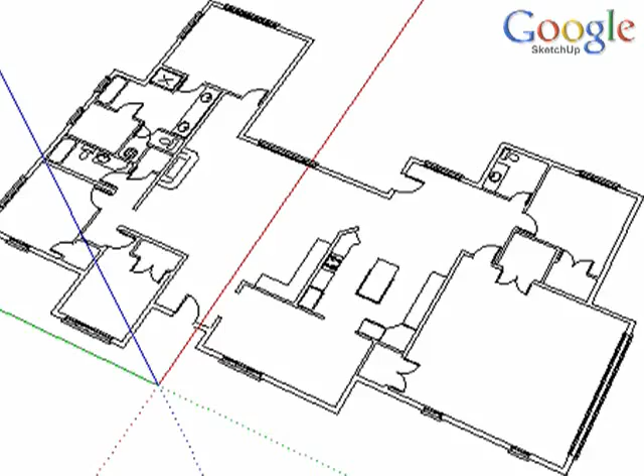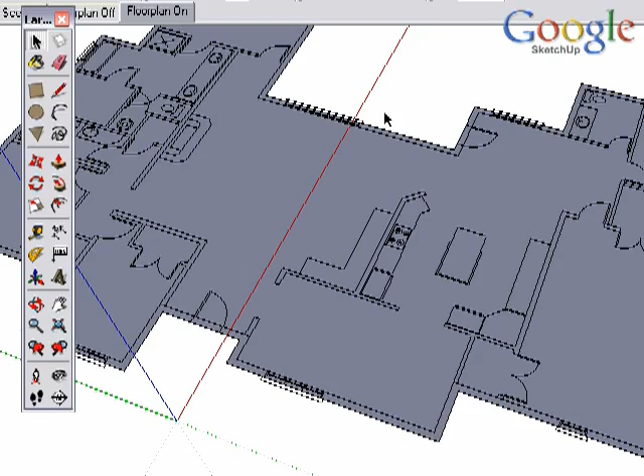There are many strategies to working with CAD files in SketchUp. This video introduces our recommended method, though we encourage you to tailor these techniques to best fit your workflow. Keep in mind that although this information should be useful to any SketchUp user, we will progress through the steps assuming you have a basic knowledge of SketchUp tools.

Start by going to the File menu and choose Import. Find the CAD file on your computer and open up the options. Check both of these boxes and leave those on by default. Set your units to match the units you had in your CAD software. Preserve drawing origin is important if you're going to bring in multiple CAD files.

Make sure under Files of Type that you've chosen AutoCAD Files so that you can see the CAD file to bring in. SketchUp will share some import information with you. Close that dialog box. Now let's examine the model.

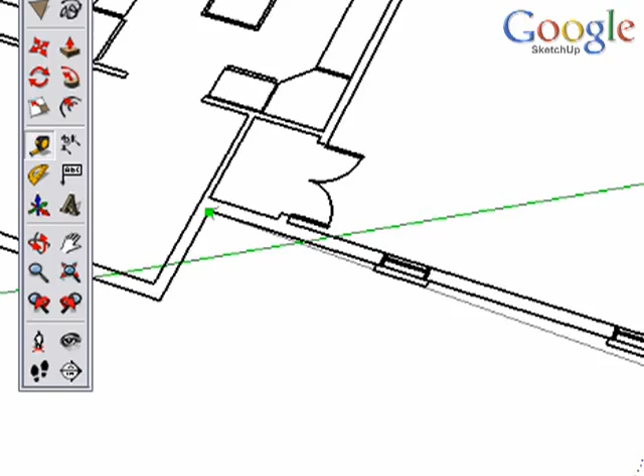The first thing you should consider and get in the habit of doing each time you import a CAD file is to check the physical size of the imported CAD file. Use the tape measure tool and measure something you know. I know this wall would measure at 5 feet, and so it's at the correct size.

However, often your CAD file will come in and it will not be at the correct size. If I measure this wall, it measures at 27 feet 6 inches. You can actually resize models in SketchUp by typing in a new dimension and pressing the Enter key. I made that wall 5 feet. I'm going to measure this wall again, type 5 feet, and now I know that it's at the correct size. So you can use the tape measure tool to resize the model if it's incorrect.

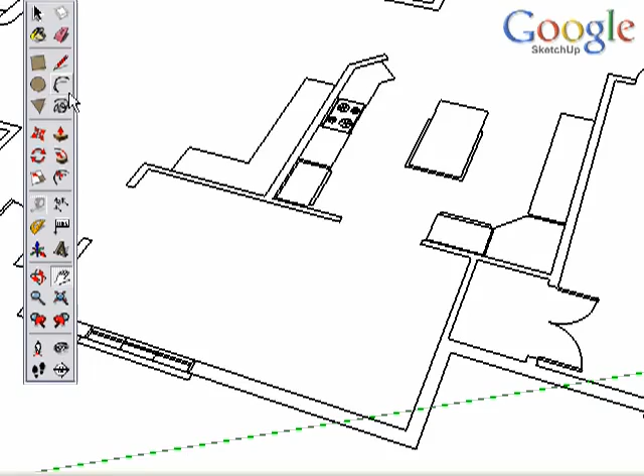This is a previous method for using CAD files. You trace over an edge, creating a surface, and then are able to pull that up. Now this creates some unnecessary lines that you need to clean up. Usually that's not too big a problem.

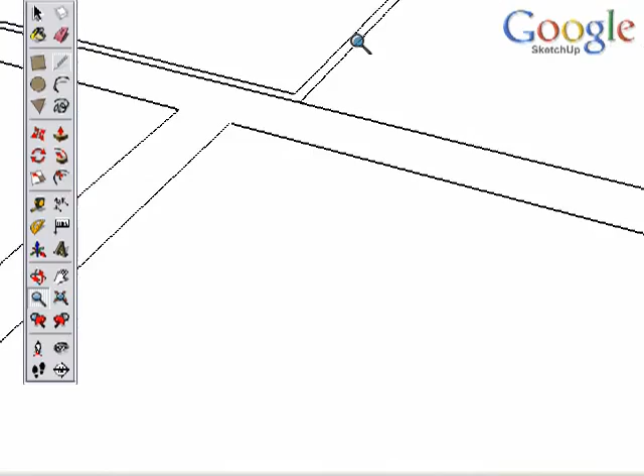The problem comes here. As you're working around your model and trying to create surfaces to pull up, sometimes it doesn't work. As we trace over these edges, nothing happens. And here's why: zooming in reveals that in fact these two edges don't meet. There's a little gap there, and SketchUp requires that we have a full closed loop of edges to form a surface, and that's why a surface couldn't be created.

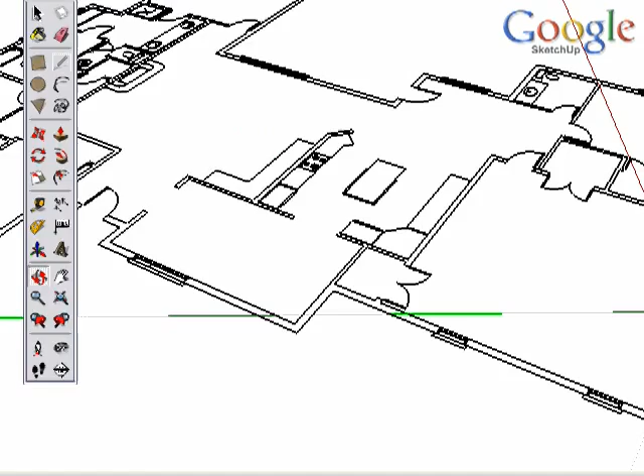Those little gaps tend to pop up all over in CAD files, and they're very difficult to find and just cause general problems. For that reason, we recommend the method where we create this CAD file as a group and use it as a reference only. We're not going to use it to create the geometry, we're only going to reference it and create a model on top of it. I'm going to import this CAD file again.

You'll notice that there was nothing existing in the space before, and as you see, it brings it in as lines and edges, and components out of things that were blocks in CAD. So I'm going to select it all and create a group.

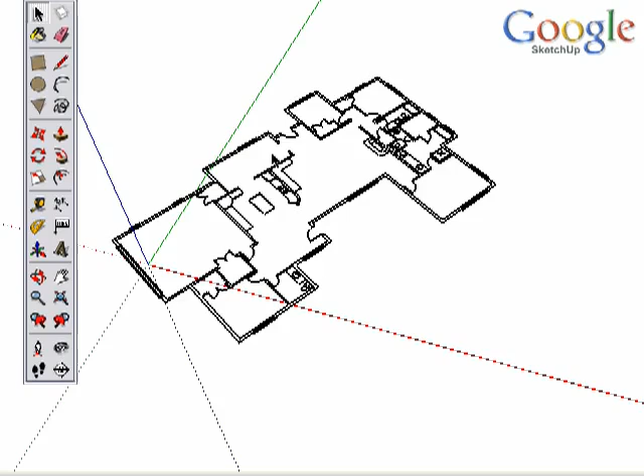We'll start a new file and show you what happens if you import a file and you have existing geometry. Let me draw a line. So now we have something existing in the model, and we import the CAD file. What you'll see is it's grouped automatically. Before it was not grouped, and we had to make it a group, and in this case it is grouped. That's just so you understand when things are grouped or not when you bring a CAD file in. If you have anything existing, your CAD file will be grouped automatically. Otherwise it won't, and you'll need to group it yourself.

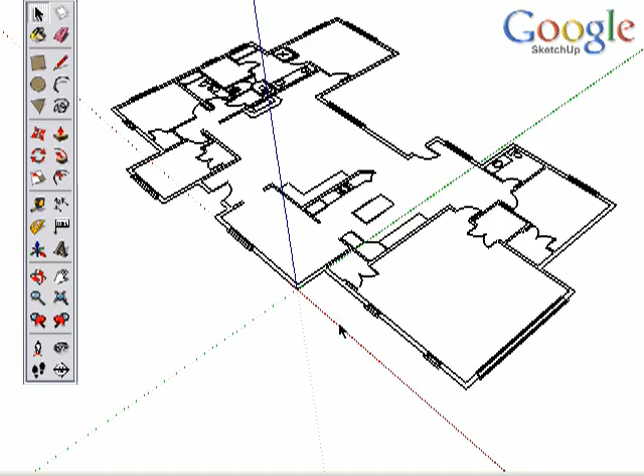The next thing we should do is line the axis up with the CAD file. We can do this with the axis tool very quickly and easily. Or as an alternative, if we left the axis in its default position, we could rotate the model and line it up with the axis.

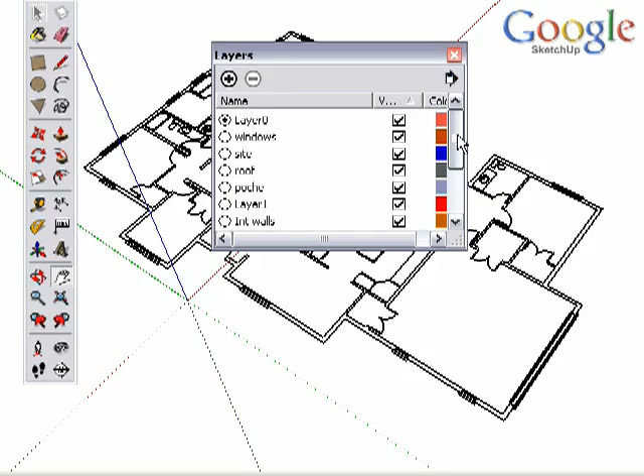Now let's look at the layers. When you bring in a CAD file, it brings in the many layers that you've created in your CAD program. These layers can cause a problem if we leave the geometry on all these different layers. So what we recommend is that you select all the layers that came in. You can see Layer 0 at the top. Select all the layers that were brought in with the CAD file, everything except Layer 0, and delete them.

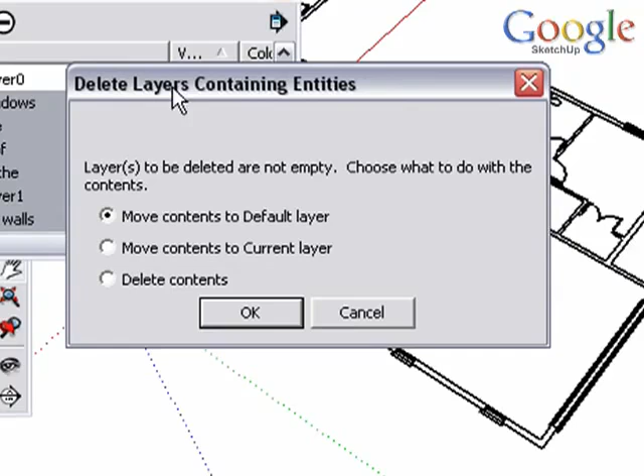And choose Move Contents to Default Layer. In this way, we won't delete anything that we've imported, but we move all the geometry to one layer, the default Layer 0.

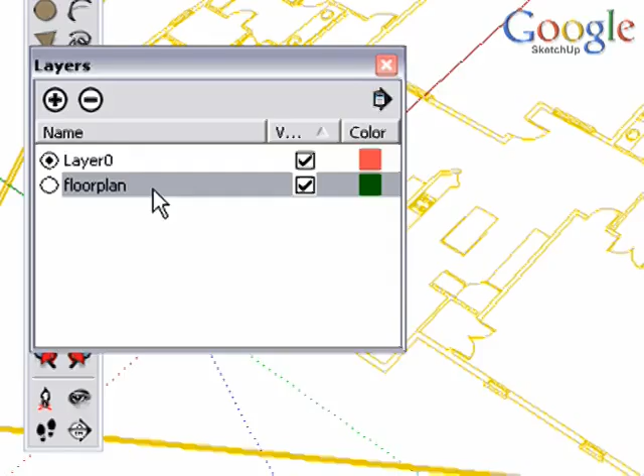Now let's create a new layer. We can name it Floor Plan, and we'll move this group to that layer. Bring up the entity info for the group, which you can do through a right or context click menu, and under Layer, choose Floor Plan to move it to that layer.

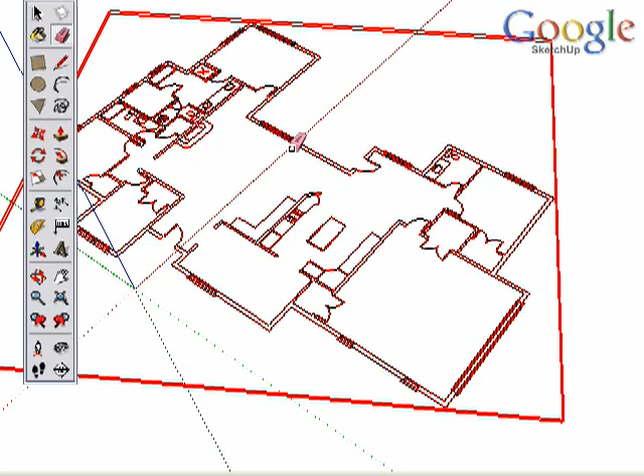Now in the Layer dialog box, we can turn the visibility of the layer on and off. This will become very useful, especially as it's a reference only, and we can turn that reference on and off. Right or context click on your group and choose Lock. Now we can't erase or otherwise manipulate our reference layer.

Another setting that you might want to change is the style. Open the Styles dialog box and choose the Edit tab. Under the lines, you can see we can turn the profiles on or off. Depending on your personal preferences, you may want to turn the profiles off, or you can thicken them up if you like. For our purposes, we're going to turn them off.

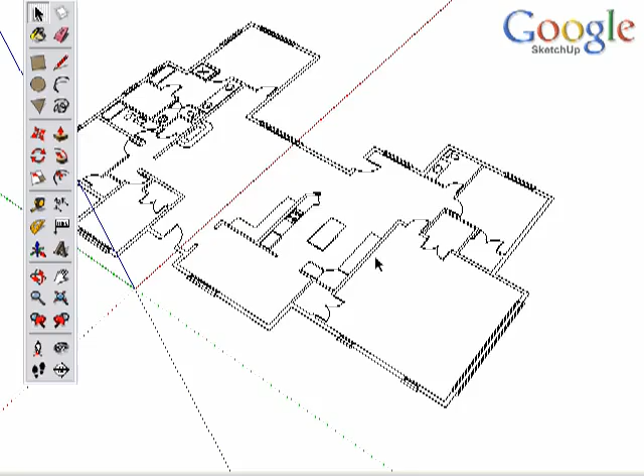The final step we'll take in preparing this model is to bring up scenes and associate these scenes with the layer visibility. Again, you can find this under the Window menu: Layers, Scenes, and other dialog boxes.

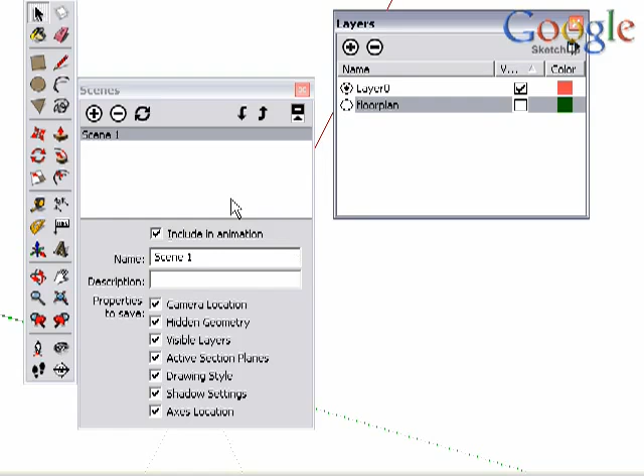In the Layers dialog box, I turn the visibility of the floor plan off. And in Scenes, I'm going to turn off all of the properties to save except visible layers. I only want to affect layer visibility. And add a scene. Rename it. And press Enter. Now I have a scene with the floor plan off.

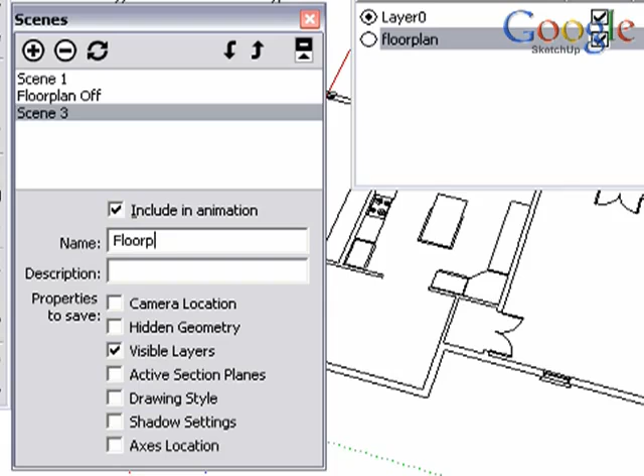In the Layers dialog box, turn the visibility back on and add another scene. Rename it. Now we have two scenes so that we can easily toggle the visibility of the floor plan on and off.

We've taken a few minutes to set this floor plan up correctly. After you've done this a few times, it becomes a very quick process to set up your CAD plans. Let's review the steps and then watch our next video to continue.